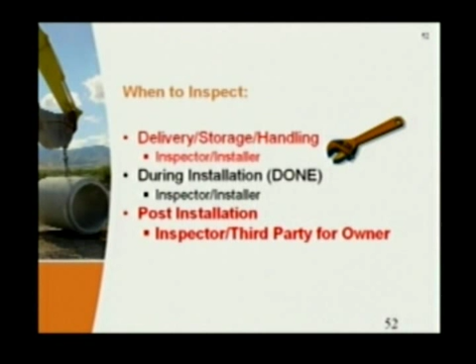Now let's talk a little about when you should inspect. Obviously during delivery, storage, and handling, you need to take care there. I can't go into great detail, but we have some good tools on our website to help inspectors and installers understand how to properly handle and offload our products. That's important. During installation, we talked this morning at great length about proper installation techniques, so obviously those need to be followed. I won't go into detail on those issues again since we covered them mostly this morning, and I suspect most of you were there. We'll touch on it a little to drive home a few points.

I do think, and I put the note up here, there's a 99% rule. I think a lot of the damage that inspectors see at the end, during their video inspections, happens from the time the truck leaves our yard... that's when it happens. So I just caution you that's a time to take care.

The contractor wants to get the product. The inspector is there to make sure everything's going well and should pay attention to what's going on. We have to make sure that when we're shipping products, we use the right tie-downs and do the right things, and when we're unloading, we do the right things too. A lot of different things can happen that damage the product, and until people start looking inside the pipe, they may not see some of that. So you need to use caution there.

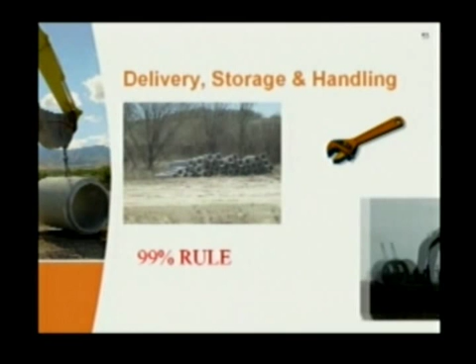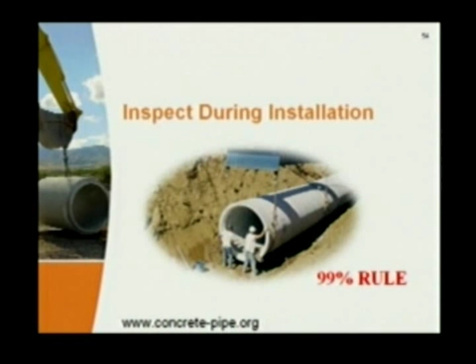We have some good guidelines on our website to help with that if you're interested. Obviously, inspection during installation means making sure the bedding's right, the backfill's right, and handling the product right without damaging it. These are the main points, the main areas of installation we talked about this morning in some detail.

But care should be taken. Good installation processes should be written either in your specs or guidelines to your inspectors, for contractors, guidelines to their field people. And they should kind of match, by the way, so that everybody's trying to do the same thing. So it's important that we watch that there.

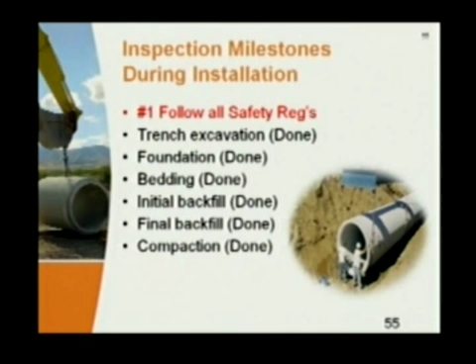Just a couple of things that we see. You may not have problems with these here, but we have seen it in other places. Lifting devices, either using improper lifting devices or handling product incorrectly. I've seen people take chains and run it all the way through the pipe and try to pick the pipe up. Obviously, that's not a good thing. You're going to break bells and spigots. I'm sure those kind of things don't happen.

But dragging the pipe along the ground, or using a forklift to move the pipe around the job site, nothing wrong with that, as long as the forklift driver doesn't do 60 miles an hour and try to jump around with it. But you can damage it. You've got to use some common sense in those handling things. Don't want to handle the product too roughly.

Homing the pipe together, putting the pipe together at the joint, making sure it goes together well, should not be a crazy hard thing to do.

I'm not, even though I put up here, using excavator bucket. That's pretty common, to set the pipe in the ground, put the spigot in the bell, use some type of mechanical device to help the line home up a little bit. I'm not too concerned about that as long as you don't ram the end of the backhoe or track hoe against the end of the pipe and tear the bell up or the spigot up. Use some kind of material, a wooden board, 4x4, something like that, to protect the pipe to help it go together. I don't have a big problem with that as long as you use common sense and don't tear the product up while you're installing it.

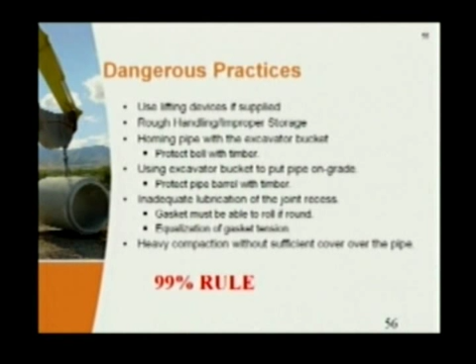So it is important to know how to do that. Let's say you put a gasket in wrong and try to put the pipe together, you could pop a bell. It's possible. You can be putting butyl mastic in and put it in the wrong place while homing the pipe, and guess what? The pipe will not go together because you put it in the wrong place. So doing those things properly will help make sure that we don't see some of those kind of problems in your post-installation inspection. And so I wanted to cover that before we got into post-installation inspection.

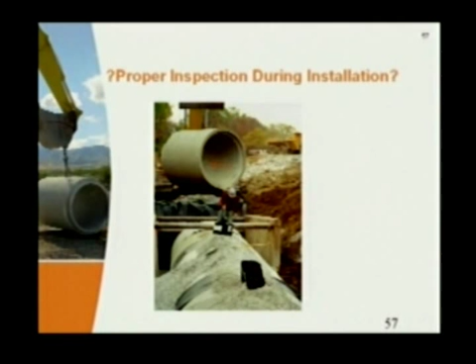Any questions, comments yet? All right. You guys are being mighty quiet. Is that an after lunch thing? I think that's what it is.

All right. Post-installation inspection.

As I stated earlier, over the last 6 or 7 years, this has become a bigger and bigger issue in the United States for sure. You'll see a map in a few moments. It's really concentrated mostly on the East Coast, so that's close to you, happening very close. I know already HRM videos their lines now as part of their post-installation process, so some of these techniques are already being used here in this area.

Just general comments - my personal opinion is, after studying it very hard, you're going to see some very good equipment in a few minutes that I think is very accurate, and you should be using it for sure on small diameter pipe that you cannot have manway access to. I certainly think any pipe that you can safely enter and look at with your own eyeballs, measure with your own hands, see what's going on with your own eyes, you're going to have a much better understanding as an engineer, and it's going to be much easier to evaluate that pipe than through camera.

I'm a strong believer in videoing lines that need to be videoed, which would be smaller lines you can't get into. There are some other good tag-along tools that go along with that video equipment that will greatly help you as an engineer or as a municipality evaluate what you're seeing. But running a camera through a line and visually trying to figure out what's going on just based on what the camera sees is very difficult and takes a lot of experience to understand what you're seeing.

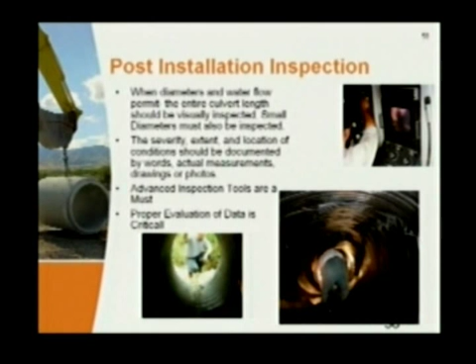But I do think there are some very good tools. Again, I think the most important thing that I hope comes across today, and we'll get there in a few minutes about evaluation, is it's one thing to see it, it's another thing to understand what you're seeing. I hope I can give you some good information there that will help you, whether you're a producer, a contractor, or a municipality that has to try to figure out what's going on, what you're seeing in the post-installation video.

So for concrete pipes, which we'll focus most of our conversation on today, because I think that's what you've come to hear about, there are several things to look at. Most of the time, the specifications I see require in their post-installation review to at least address misalignment if there is any, look at the joints, see if there are any cracks in the pipe, evaluate those cracks, and check for other structural issues that might be evident there, like spalling, slabbing, those kind of things.

But by far, the most common things that people ask me to look at and evaluate for concrete pipe are two big issues: joint gaps and cracks in the pipe wall. I want to clarify that's not to say we have a huge problem with either one, that's just what we see people asking about most in post-installation videos.

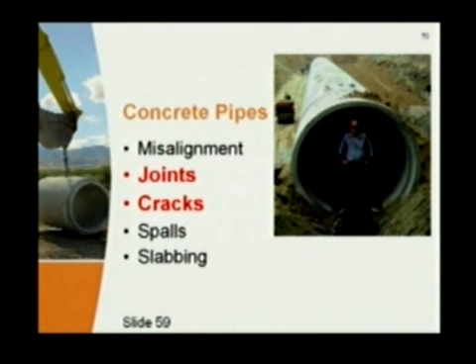So I do have some experience watching these videos. I don't have videos embedded here because I haven't figured out how to embed videos in PowerPoint yet. But it's not fun to watch anyway, so I didn't put any in. We do have some still shots from videos that are much easier to understand and look at.

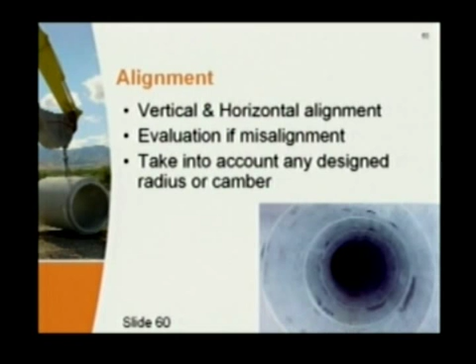We talked about cracks and joints a little bit, and I'll touch on joints again in a minute. But on alignment, we rarely have alignment problems with concrete pipe. If you see a curve in a concrete pipe, most likely somebody meant for that curve to be there - they don't just move around willy-nilly. It's a very stiff product. We don't see much vertical sagging normally, that's pretty rare, and we certainly don't see horizontal movement because the product has enough mass that it doesn't move while you're backfilling it. So thank goodness, we don't have that problem very often.

I'll touch on joints for a minute, though I can't go into great detail with only an hour. Let's say you're looking at a gasketed joint. Any manufacturer providing a gasketed joint should be able, themselves or working with their supplier, to give you an acceptable leak-resistant gap tolerance for that product.

I'll give you a chit-chat rule - this is not the official rule from Shaw, I'm not speaking for Shaw right now. They, working with Hamilton Kent, and both are here today, can give you acceptable joint tolerances for every size of pipe, and it usually depends on the pipe, their joint design, and what kind of material they're using in the joint. It's pretty simple.

Almost all the concrete pipe I'm familiar with that uses gaskets has some tolerance. A good rule of thumb is about an inch most of the time - even with that gap, with a gasket, you're still going to have a good seal. Now that's with a gasket. If you've got a butyl-mastic joint, you shouldn't be looking for a watertight joint on a horizontal alignment using butyl-mastic - you're looking for a soil-tight joint at best. You can probably go more than that and still have a reasonably good joint.

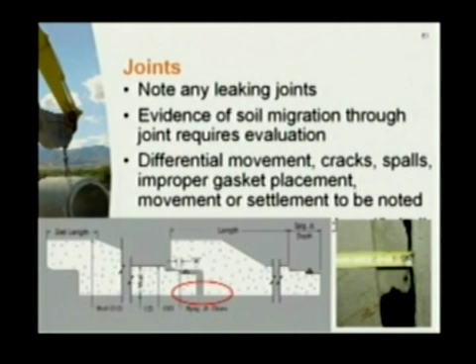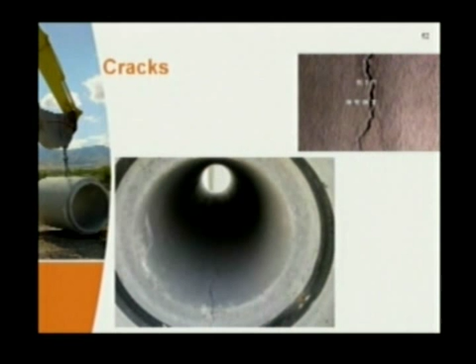I'll skip through the rest of the conversation, but that's the main points I wanted to make about joints and joint gaps. The issue we're continually talking about now is that a lot of folks looking inside the pipe find hairline cracks, 0.01-inch cracks. What's acceptable, what's not, what if the crack's here, what if it's there. We're going to talk about those things to help you better evaluate what's going on inside the pipe when you do see a crack.

I'm not going to say much about flexible pipe. The only reason I bring it up is they also have tools to remotely measure some of the conditions you'd normally find in post-installation inspection for flexible products. The big things you're looking for there are misalignment, buckling, bulging in the wall, deflection, wall buckling - those kinds of things, which are highlighted here.

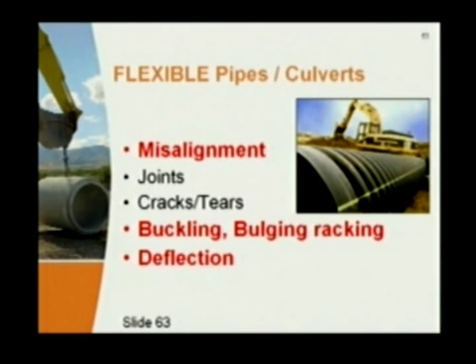Between good camera shots and another tool called a laser deflectometer, they can actually remotely measure deflection, out of roundness, deformations, and things inside flexible pipes as well. So they also have tag-along tools that can look for these types of situations you might see.

Deflection, ovality, inverse curvature that you saw in one of the pictures before. Usually flexible products have some type of deflection criteria that decides whether that pipe should remain in place with no action, should have some remediation, or should be removed.

This is kind of the typical information we see in our specifications throughout most of the United States, and I don't think it matters where you are in the world. If it's a flexible pipe, it's a flexible pipe. That's pretty good guidelines there.

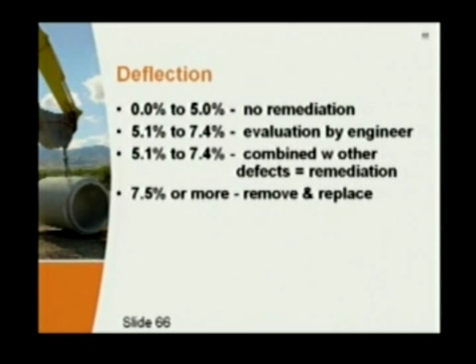Post-installation inspection - the really good tools, I think, if you have a smaller diameter pipe especially, is good closed-circuit TV cameras. Those cameras have greatly improved over the last 5 or 6 years. They've been used for many, many years in the sanitary sewer market. There's 4 or 5 excellent producers that make cameras and post-installation inspection equipment.

I didn't put their names in here, didn't think that was appropriate, but if you want to know those, come by the booth - I'll share that information with you. A lot of good folks and good equipment to do that.

The cameras, as far as I'm concerned, closed-circuit TV cameras for small diameter, those would be an appropriate design or inspection tool for any of the products you want to look at - corrugated metal, HDPE, concrete, whatever. I think those are reasonable tools to use.

Those cameras can look at pipe as small as 4 inches, and some of them can look at pipe up to 120 inches in diameter. So they have a wide range of flexibility and size, and they're very good and very accurate.

We also see a lot of mandrel testing required for flexible products because they're looking for that deflection. That's really the key thing they're looking for, to see if that pipe has over-deflected past what it should. Mandrel testing would be a reasonable test to run on flexible products if you don't want to run the laser deflectometer we're going to talk about. So that checks the shape, checks deflection. Those can be used for flexible products.

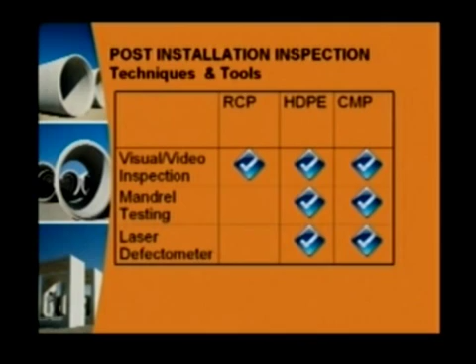So different pipe, different tools. Okay? That's really the point I want to make there. I think you got that one.

Mandrel testing - we listed it on the slide before. I think it's an appropriate testing method for flexible products, except there's a few problems, a few things you need to understand. If you pull in a mandrel or want to use a mandrel, here's the hardest thing you're going to have to do if you're a municipality: you're going to decide what is the deflection of. Am I trying to get 95% of the nominal diameter?

Am I trying to get 95% of the minimum possible diameter, considering manufacturing tolerances? Do I want to know 95% of the actual mean diameter? There's all kinds of ways to talk about inside diameter. The simplest way, for Al Hogan from Tennessee who's not very smart, is to say if it's supposed to be 24-inch ID, which is what you're hydraulically designing for, then you should be 95%, or 92.5%, or 96.5% of the nominal ID you're looking to do. But you'll hear all kinds of things talked about.

That's the hardest thing to figure out, because if you use some number that changes from job to job and manufacturer to manufacturer, that means every time a contractor wants to pull, or you want to pull as a municipality, a mandrel for a different contractor, you might have to buy a different mandrel every time, which is not very cost effective.

So that's an issue. The other thing with the mandrel, you really only know what's going on at one point. If it gets stuck, you know it got stuck at that one point. Now, you can use footage on a rope to decide where that is, kind of figure out where that is in the world. But then you take the mandrel back out, turn it around the other side and start pulling it from the other direction, and it gets stuck somewhere else. So what do you know between the two stuck places? Not anything. And there's no way to get to it if there's no manway access. You don't know what's going on. So that's kind of a shortfall.

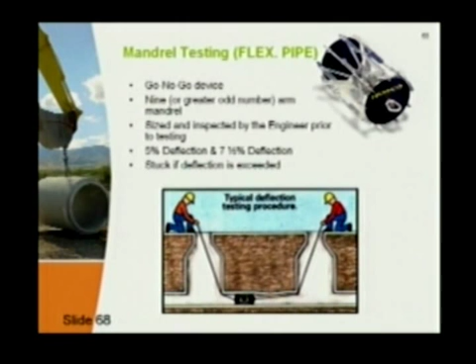What if the camera's not centered in the pipe and you're looking around a joint? What do you think the joint's going to look like? If you pan around the joint and the camera's set near the floor with a big pipe, it's going to look like the joint gap is going like this, because he's going to keep the same magnification. He's going to sweep that joint.

These cameras will look 360 degrees. They'll pull up to a joint, and you'll see them look down and see their toes -- I call it toes, it's actually the wheels, the little rubber tires. So they look down at the rubber tire: okay, I'm on the joint. They go right around the joint. And by the way, when they're inspecting, they look at every joint too, almost -- if they're any good, they do. So they're looking at every joint. They do pan and tilt and all those kinds of things. Very good lighting. They're supposed to be in the middle, but they can see anything. I mean, they will see anything.

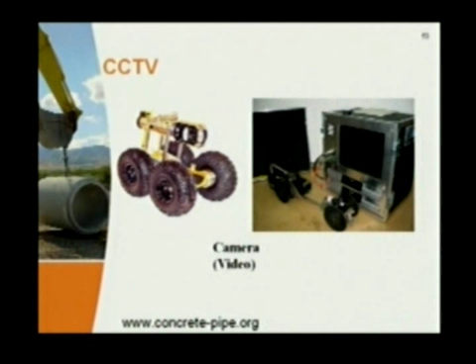Very nice tool to have if you're looking at those flexible products that are too small to get into to measure. Good tool. Different lasers, different manufacturers, their lasers look a little different, but they all do about the same thing.

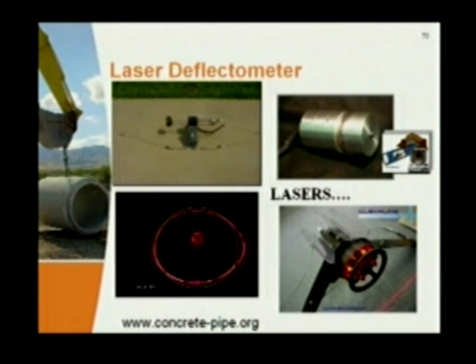There are some cameras that are one-pass, where they do their laser and video work at the same time. That's kind of handy, but it costs more. Gee whiz, I bet you couldn't figure that one out. But most of them are a two-pass system. Two-pass takes longer, one-pass doesn't take as long. So there's some swap out there in equipment, but they both do the exact same things. One of them is one-pass and others are two.

Now, for measuring other defects or conditions - joint gaps, cracks, tears, other issues that you might want to look at inside a pipe, how big the bug is on the side of the wall, or whatever you want to look at - you can look inside the pipe and measure accurately with the video micrometers.

Then they can, real time, setting right there - if you want to look over their shoulder in their truck - tell you exactly how wide a crack is, or how wide a joint gap is. So they can really see a lot of stuff. They do that by zooming in really close, so they can clearly see the edge of the crack.

They have to make sure they zoom in so they can see the edge of the crack, and not just look at a shadow. They also have to be centered right over whatever it is, whether it's a crack, a joint gap, or a tear. So there is some operator training that needs to be done when using these kinds of tools. But they can be very accurate.

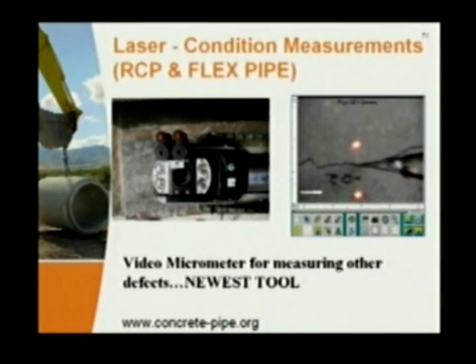But this tool can actually measure, if the operator's pretty good, cracks down to as small as that little leaf gauge that's been passed around to you.

I talked about the trends in the United States. Both tools we just reviewed, the video micrometer and the laser deflectometer, are being required or allowed right now in about 11 or 12 states, and that changes almost weekly. This map is probably a month or so old, but this is generally what's going on. The ones you see hashed, cross-hatched, those are the states that require or allow that type of technology in their post-installation inspection criteria.

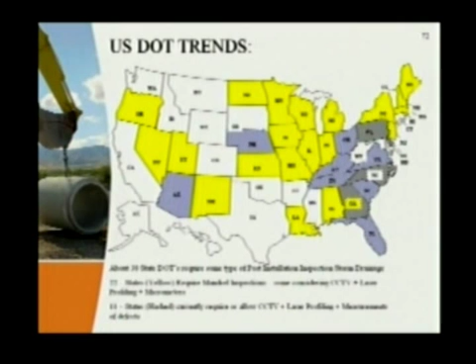Many of them require it, a few allow it. The states you see in yellow require mandrel testing for flexible products to make sure they're not over-deflected in their post-installation inspection. So that's the difference in the colors there. We're seeing quite the trend, and the big trend is it's East Coast. I think after that you're going to see it moving west, but it's really concentrated right now on the East Coast.

I think we've already talked about this. I think they're very good tools. We support the use of these tools. We think it's good for all of us to know what's going on inside of products. It's a great tool to help us, if everybody's doing everything right, see if there's things we can improve on, which is a good thing.

They do find everything. There ain't no hiding from anything, there ain't no joking around about it. It's real life, no kidding measurements, and they're really pretty accurate. So you can't really argue the technology. The technology is really good, and it's even getting better as we move along. So it's a very good product.

If you're into asset management, if you're a municipality or whatever, it's a great first step. When you do that post-installation inspection, you know day one what you accepted, what you got. And you can continue to compare what you got the day you bought it to how it looks 20 years from now, 30 years from now, 50 years from now. So we think that's going to be good information, especially for our product, as folks start doing asset management and looking at their installations over time.

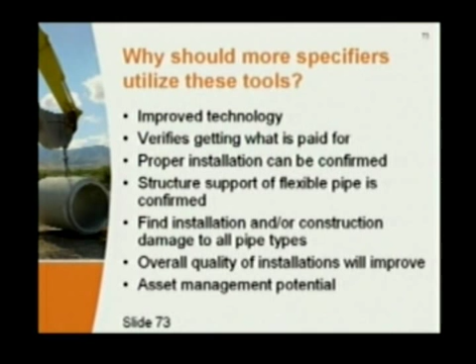Now, over the years, we have always chit-chatted about cracks in concrete pipe. We're going to talk about it. Y'all are probably sick of hearing about it for about 20 or 30 minutes here. But it is important to understand cracks in concrete pipe: how they're there, why they're there, what causes them, what's okay, what's not okay. Very important.

I do want to say this, and I challenge you to do this: there is no concrete surface in the world that I know of, hardly, that you cannot find some type of crack in. Your sidewalk, any flat work, concrete slabs, concrete pipe, bridge beams, bridge decks, anything you want to find, they're going to have some cracks in them. Now, the issue we always have when we start doing really good post-installation inspection, again we support it, but we have to go in and start talking about issues and cracks again and what that means to you, what you should be worried about, not worried about.

When we start doing good post-installation inspection, almost without fail, every time some new standard comes out of the DOT, the first 2 or 3 jobs are just a fire drill. Everybody's pointing, everybody's screaming, everybody's yelling, the contractor's mad at the supplier, trying to be nice to the DOT and nice to his customer and all those things. It really gets difficult to deal with.

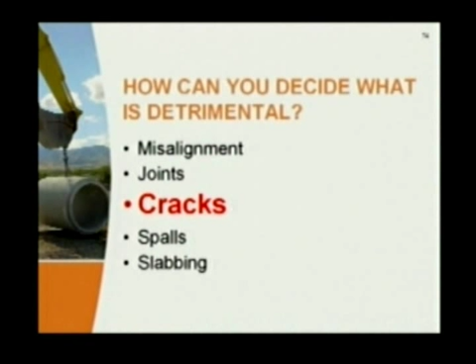We're involved, engineers and other engineers are involved. You get about 10 people with 10 different ideas. So I hope this today will maybe get us generally on the same page here. I think that'll help when you do see things in your post-installation videos.

Now, just a little bit of concrete anatomy. Concrete is very strong in compression, weak in tension, right? We know that. We understand there's some areas of our product that will be in tension once it's loaded, and we'll look at that in a minute.

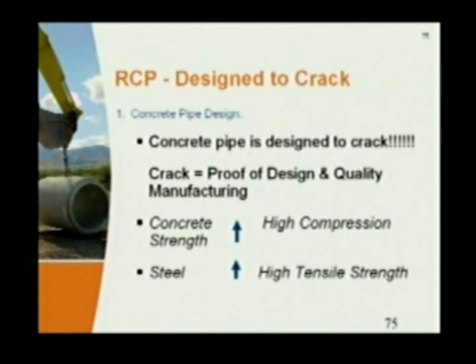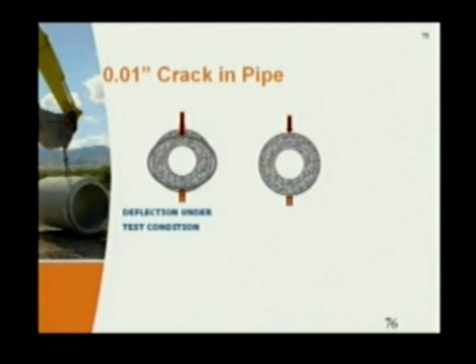Those tension areas, guess what we put in them? We put in steel. That's the reason our pipe is reinforced concrete pipe. If we didn't have any tension in the product, we wouldn't need any steel. The steel is there to control the cracks from getting too wide, okay? That's the very basics of the crack, and I think you guys probably understand that pretty well. When the pipe's loaded, it is trying to deflect, even though concrete pipe will not deflect very much. There are zones of the pipe that go into tension.

Those tension zones, once it's loaded, are the areas in red. So where would you expect your cracks to be if you ever see a crack in a concrete pipe? What's the first place you expect to see a crack? Bottom of the pipe. Thank you very much, that's normally going to be the first place. Anybody got a guess on the second place you're going to see a crack? Top. Perfect, you guys are way ahead of me.

Now what if you see a crack on the inside of the pipe at the spring line? It's on the inside, it's probably all the way through. I don't think you're in trouble, but it is probably all the way through. But remember, that crack's probably not ever going to get very big because it's in compression right there. It's trying to hold itself together, the product is. So that's kind of how it's going to happen.

Let me say this, I think maybe I got on the next. No, did I do? I'm trying to think if I got a three-edge bearing rack on here. I don't guess I do. I must not.

Tied together pretty well what we're talking about this morning. We do strength test our pipe before we ship it. We do that through the use of a three-edge bearing rack, and there may be a picture coming up. I can't remember if I've got one on my slideshow here or not. But we load it just like the red arrows show it. Two little hard rubber strips at the bottom and a hard rubber strip at the top, and we compress that pipe and check the strength.

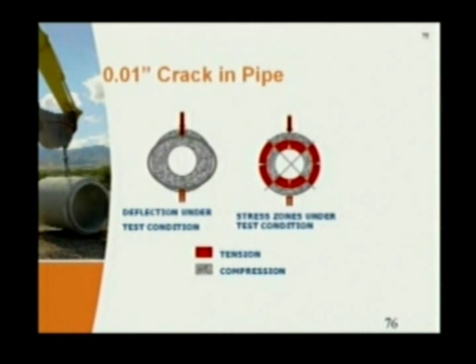One of the other things that we do, if you get to do a plant tour, is maybe, as we talked about a while ago, do a demo for your post-installation inspection. Because then you can set up the pipe on the ground, we can pre-crack it, we can hold a crack open at different dimensions. You can run the cameras through it that we talked about, and you can see how the camera sees a crack.

And you can take your eyeballs in that pipe and see how your eyeballs see the crack. And where's the little leaf gauge at? Somebody got it, little leaf gauge - oh, somebody got our leaf gauge. Where's a 100th-inch leaf? Come on now, you can't steal a leaf gauge, that thing's worth $10. There it is. So you can take that leaf gauge and see - the camera sees that type of crack, and it can zoom in on that crack and make it look extremely large.

But in reality, the crack's not changing, the zoom of the camera's changing. That's an important thing to understand. You can tell when you're watching videos, you can see them zoom in, zoom out. And if you really have the full reports, you can tell what zoom amount they're at. So that's important to know.

Now, we talked about how the cracks form. How am I doing for time, Ron? I'm okay, I'm good, right? Yeah, I'm real good. All right.

So let's talk about now. We talked about how the cracks form a little bit, talked about our test crack criteria being 100th inch. Understand, that's a test criteria at the plant. It has nothing to do with the performance of the pipe in the field. Nothing. Not anything. Zero. But we do need to understand the width of the crack and maybe have some criteria there. Understand what some of the national standards say about that, because I think you could use those as a guide, and we'll talk about those.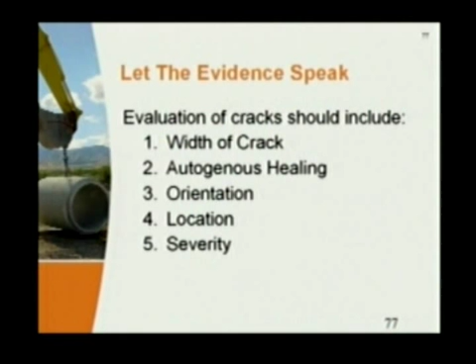Now, I don't know if I've used this word or not yet, hairline crack. When you come see a pipe test at our plant, when they're testing it, you'll see a very small crack form before we get to the 0.01-inch crack. That crack width that's less than 1/100 of an inch is a hairline crack. Now, not only can those hairline cracks form by load, as we're loading on a 3-edge bearing, they can also form just by what we call shrinkage cracks.

Most of you know a little bit about concrete. We do cure our concrete very well. We have a prescribed rate of temperature and moisture control that we have to meet to get good quality pipe, and we do that. But no matter how good you try to do that, and as best you can do, occasionally you will have some shrinkage cracks right in the surface of the concrete. That's not structural. That's not an issue. It's very shallow, really just on the surface. So those, you can see some of those very small hairline cracks because of shrinkage.

You may see those on your job site when the pipe gets there. That does not mean there's anything wrong with the pipe. That's not a structural issue. It's, in my opinion, not even an aesthetic issue, but some people think it's an issue. So be aware of that. So hairline cracks are not a problem. Hairline crack on the job site, delivered, or in the ground, would be less than 1/100 of an inch. That is a definition of hairline crack. And we've even talked a little bit about how they can form.

Now, the next one that we see talked about a lot is a 0.01-inch crack. It's talked about a lot because our manufacturing standard and our testing standard for our 3-edge bearing, that's the crack we're looking for. That has nothing to do with cracks in the field. But we end up having to talk about that because that number gets thrown around a lot. 1/100 inch crack, and who's got the gauge now?

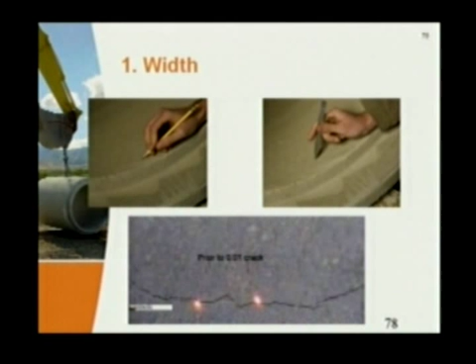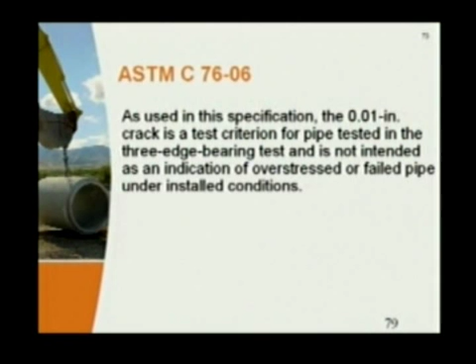Very, very minor crack as far as I'm concerned in the field in the installed condition. Again, ASTM sets that as a test criteria at our plant. So then we have people trying to apply, municipalities, whoever, consultants that write specs, they want to apply that standard to pipe in the ground. That's not a good application. It is a testing criteria at the plant.

We've had to address this for 80 years now, so we're used to talking about it. That 1/100 inch, even the test criteria is arbitrary. It really does not mean anything structural, other than when they first started writing standards back about 1900, the spec said when we test our pipe for strength, you were watching for that crack, the first crack to form. Well, without my glasses, the first crack's not going to form for a long time because I can't see it. With my glasses, the first crack forms a lot faster. I can say, oh, there it is, I got it.

You stop the test. Well, my test today, and John can come back behind me tomorrow, run the same test on the same exact piece of pipe made the same day, and he would see the crack at a different time. That's not very consistent. That's not giving us good information. We have to have something more

objective than that. So it said, oh, the guy happened to have a feeler gauge, 100th inch. Oh, there it is. That's good. That's a kind of a small crack. That's what we're looking for. We're going to start looking for that. What I would say is really the steel is picking up zero load until at least a 100th inch crack, maybe even a little past that, but at least a 100th inch crack.

The steel is not catching any load until that happens. So in my opinion, a 100th inch crack has nothing to do with structural condition in the field, and should not concern you.

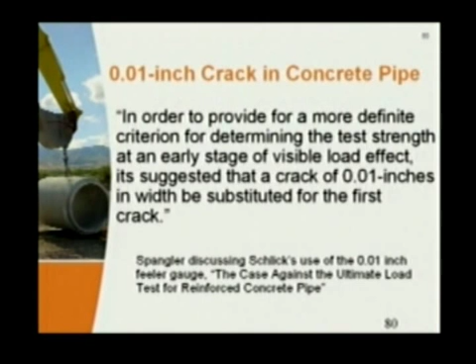Again, we put the reinforcement in our pipe to control the crack width. That's the reason it's there. It also helps us for some strength, but mainly it's helping us with crack width. Most of our product without the steel on the 3-edge bearing rack would make the 0.01-inch crack without the steel. But what would happen as soon as we got past the 0.01-inch crack with no steel in it? Very quickly what would happen? We would have a catastrophic failure. It would bust all to pieces.

With our steel, you come to their plant, and I guarantee this will happen. You take a 36-inch pipe or bigger - I'm using that because I know this will work - you can load that pipe to 0.01, and it probably won't have a crack in it. The prescribed rate won't even have a crack in it. It'll usually go 10 to 20% past that before we even see a 0.01-inch crack.

Then we test it up to ultimate. It'll usually exceed ultimate by 10 or 15%. And you can still continue to load that pipe. Now, the gauge won't measure any load, but you can still continue loading. The cracks just keep opening. It's not really taking any more load. It's just deflecting. But that pipe will never bust all to pieces and just fall apart.

They can keep on hammering on it. It just won't fall to pieces. So it's a cool thing to see. Don't know what it has to do with what we're talking about today, but anyway, it is very strong. That's the reason we have steel in it.

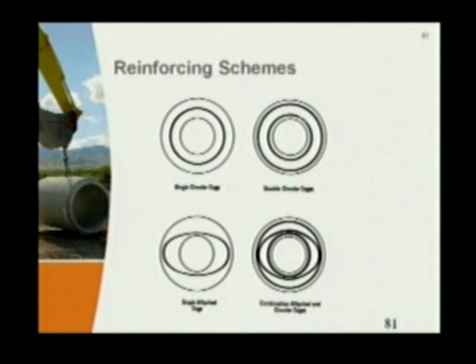It controls the crack. The steel in small diameter pipe, which we have not very much cracking issues with anyway, that steel is right in the center of the wall usually. And we usually use a single cage up to about 24, 30, 36, something like that. And once we get to 30, 36, it's usually 2 cages. You see what a 2-cage scenario looks like in the top right-hand corner. Those 2 top pictures are the more common methods of steel reinforcement placing. The other 2 would be some really unusual setup.

We've been talking about this for a long time, even back as early as the mid-1900s, and we started getting our bedding information much better and doing a lot more research. One of the pioneers in our industry, who did a lot of research for our pipe, made the comment that cracks up to 1/16 of an inch will not permit corrosion except under the most adverse conditions.

That's usually what we hear from engineers or people looking at the pipe trying to evaluate it. It's got a crack in it, I'm getting some seepage through the crack, so I'm worried that the steel inside the pipe is going to rust and cause spalling. That would be a very rare condition for a crack.

As he says, up to 1/16 of an inch, I think that's pretty safe. I don't think you're going to have any problem with that. Remember, one side of the crack is trying to open on a round product, and the other side is trying to stay shut, no matter where it is. One side's in tension, one side's in compression. One side is squeezing down, ain't going to let nothing in. The other side is trying to open. But they're doing it at the same time.

Even if somebody made the comment, if it's through the wall, you've got a problem - I don't think you've got a major problem just because it's through the wall. I think there's got to be something else that would cause you to have a big concern. Even if you had a crack at the top, bottom, and spring line of the pipe, if none of those cracks are 100th of an inch, you definitely don't have a problem.

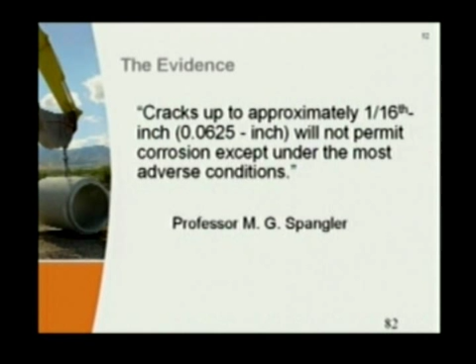Now, when they start getting open more, we'll talk about that - maybe they need to consider some other things. But a 1/16 of an inch, according to Mr. Spangler, would be okay. You shouldn't be worried about corrosion in your steel, and I think that is a reasonable thing to think about.

20 minutes. I'm on 83 - oh, that's pretty good. I'm okay, I think I got a 98, so I'm getting close.

AASHTO LRFD - I didn't say this yesterday, but that stands for the American Association of State Highway Transportation Officials. Doesn't mean nothing to you probably, but in our world, I said that yesterday too and got myself in trouble. In the United States, that is the group, the DOT engineers, who get together and write specifications for all products, including concrete pipe.

So this is not a specification written by Al Hogan, not written by ACPA, not by Shaw. It's by a group of DOT engineers that write the specification. They send it out to all the other bridge engineers in the United States and say, does this look okay? So this is what they came up with.

I think it's a pretty good guideline. If you were going to write a specification for your municipality, this is a good starting point - you might want to add some detail to it. Because remember, they're writing a specification for the entire United States. You may have something you feel is a little different, that needs to be handled differently, so you might want to add a little more detail to yours. But this is what they say.

We're still talking about crack width now. A crack less than or equal to 1/100 of an inch should be considered minor and okay - we've already gone over that plenty enough. But that's even what AASHTO says. AASHTO also says a crack between 0.01 inch and 1/10 of an inch...

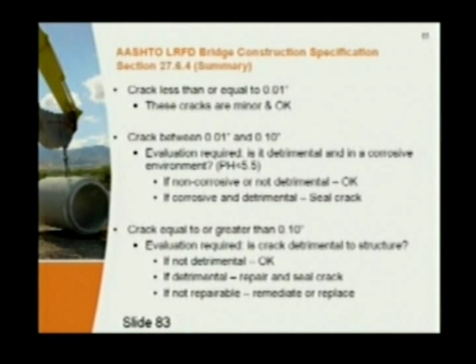For a crack equal to or greater than a tenth, they're thinking we really need to check if it's a structural issue. They don't go into great detail in their explanation, but if it's a structural issue, it needs to be repaired or fixed. If it's not a structural issue, it can just be sealed to keep water and material from moving in and out, which could cut down on the lifespan of the product. If it's not repairable, it can be remediated or replaced. That's the AASHTO guidelines, not mine.

Now, on small cracks, we have several pieces of research on autogenous healing. You can see this if you go out to the plant - if a pipe's been in your yard for a while with a small crack, you'll see this phenomenon happening. Free lime in our product reacts with moisture, and crystals start forming inside the crack, filling it up. That autogenous healing is a very strong process. In fact, you can take that pipe and put it in a 3-edge bearing rack, and it may crack somewhere else first, not even at that original crack. So it really is a real thing, it really does happen. I think there's a limit to how big a crack it will happen in - if it's a big crack, it may not ever happen because it doesn't have the two sides of concrete to bond to and form crystals.

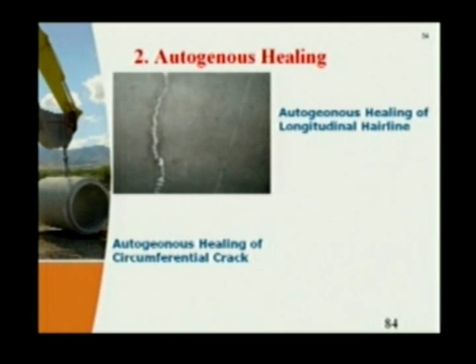I've seen research that shows it happening greater than a tenth of an inch, but a tenth of an inch is probably a good threshold to think about for that kind of thing to happen. I think it's a real issue you ought to consider. We do have some research - I'll flip through that, but I can hand it to you later if you want it.

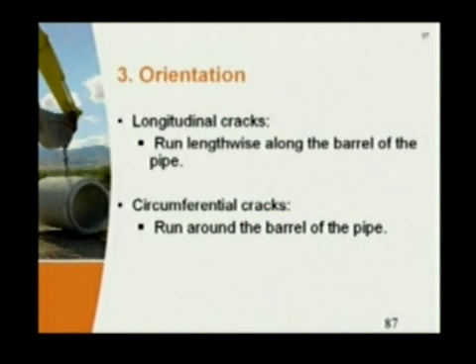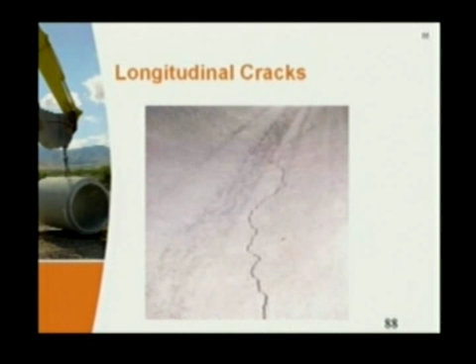Orientation of cracks: long cracks down the barrel of the pipe are normally loading cracks - doesn't mean they're overloaded, just means it's caused by loading. Circumferential cracks run around the barrel of the pipe, and we'll talk about those a bit. This is a fairly significant longitudinal crack - I don't remember what the measurement was. AASHTO talks a lot about longitudinal cracks because they understand those are loading cracks that need to be evaluated more stringently. If they're wider than a hundredth, as we already said, they ask for evaluation; they're acceptable up to a tenth of an inch, as we already talked about.

Longitudinal cracks here, again, same thing I said. I'm getting ahead of myself by a slide or two.

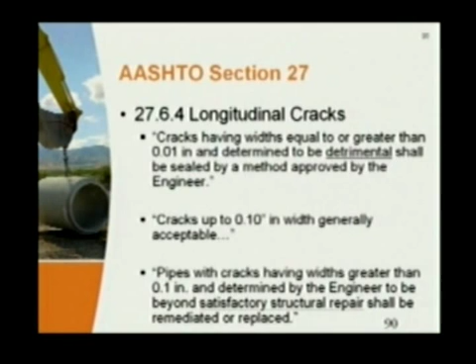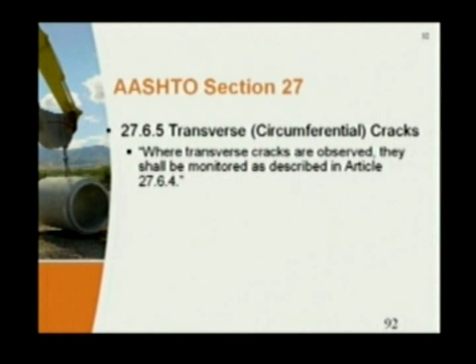Circumferential cracks, or transverse cracks as they're called in the AASHTO documents, shall be monitored, and that's all they say. And I'll tell you the reason I think they say that: those cracks are not a structural issue for us, for our product at all.

So if you get a circumferential crack, which steel is that crack cutting across? It's cutting across the longitudinals. They're only there for holding space. We don't care if every one of those rust in two. We don't care if they break. It doesn't make any difference from the structural standpoint of the wall of that pipe.

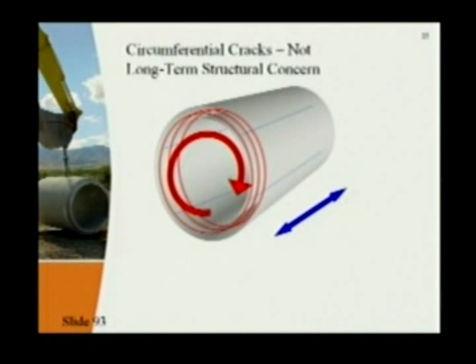Now, circumferential crack, if you have some offset in it, or it can get very wide, then you consider it as a joint. It needs to be sealed in some way to keep material from moving into the pipe. That's about the best way I can put it. From a structural standpoint, they're not a big issue.

Now we've talked about this already, so I'll skip over it pretty fast. Invert and obvert cracks, small cracks, those are normal. You should expect to see those occasionally. They're not an issue. Spring line, again, those cracks are probably through the wall, but remember, the inside is trying to squeeze together, so they're probably never going to get very big, especially if you don't see any spalling. They're not a serious consideration, but the pipe's under a pretty considerable load, maybe even more load than it was designed for.

So the first thing I go look at is design if I had those. But I still think you could apply some of the width criteria we're going to talk about to whether they should be repaired or not.

In the haunch, and when I say in the haunch, I mean between the invert of the pipe and the spring line, if you get cracks over in these quarter points, really watch those because they could be a minor crack, but there are occasions when those are a first indication of a process we call radial tension shear.

What's happening there is that the pipe is trying to deflect. It's got a serious load on it. In fact, the pipe's under such load that the steel that's supposed to be a round cage is trying to straighten out and flatten. So when it tries to flatten out, it starts cracking along one of those long bars. It'll follow that long bar, and then that steel starts trying to straighten up, and it'll pop off a large section of concrete, which we call slabbing.

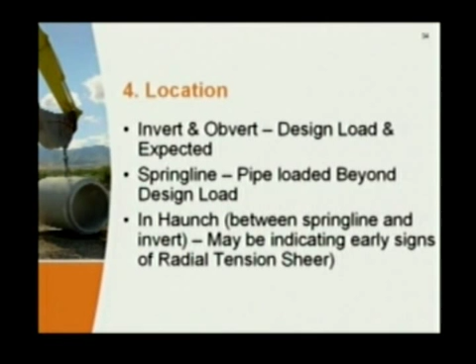Severity, again, we talked about width — I think that's your first criteria to start with. We talked about location, that's another good telling sign. Is there displacement across the crack? If not, you're probably okay as long as it's not too wide. Is there signs of radial tension shear that we just talked about? That would be an issue.

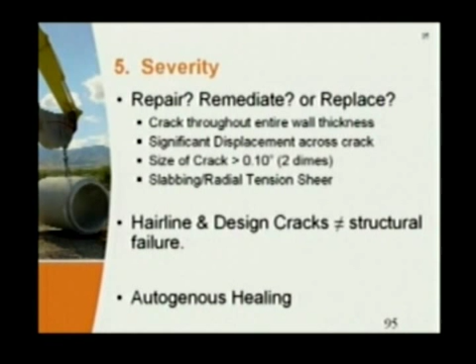Cracks up to 1/10 inch, I would start looking at whether I'm in a corrosive environment. If I'm not, I'm not too worried about it. If you have some leakage you want to deal with, seal them. But I wouldn't worry about it too much till I got up close to 1/10 inch, or somewhere above a dime width at least, okay? Consider autogenous healing in those small cracks.

I think you'll see that forming in a very short period of time. That's a good place to start from. Understand that video technology makes cracks look bigger than they really are. If all you're using is video, you need to be really sharp in understanding what you're seeing.

If you really want to be good, if you want to look at the pipe and do a really stringent inspection, get those tools that measure crack widths in a smaller diameter. In the large diameter, go in and measure them and use the criteria that we talked about today, hopefully, or something very close to that.

It'd be nice for all the players, all the stakeholders, from the owner to the producer to the installer, to have nice, clear, written direction of what's going to happen, if we see this, this is the action we're going to take. Then everybody knows what they're into.

But I also think if you do that, it needs to be reasonable. It's not to the city's advantage, the user's advantage, or anybody else's advantage to repair things that don't need to be repaired. You're spending money that does not need to be spent. Now, it's also just as bad, though, not to fix something that really needs to be fixed. So you want to be reasonable with your repair criteria.

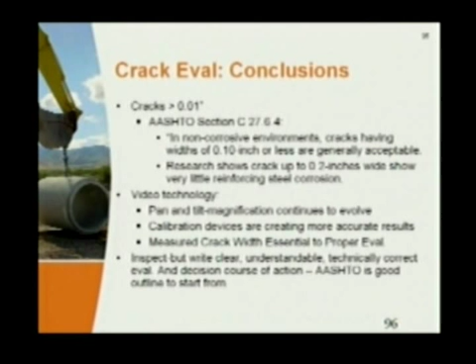I'm good, right? I got time? Okay.

How many were here this morning in our presentation? Oh, excellent, so 99% of you were here. Good, so y'all got this.

We've seen this before. This is the design we did this morning. Anybody remember what class of pipe this example called for with a type 2 bedding? Anybody remember what the class of pipe was? It was a class 3.

All right, we also ran the design using a type 3 bedding, correct? What was the class of pipe required there? It was a 3, but it was right on the edge of a 4, right on the line between 3 and 4. Depends on who you are. I would call it a 4, but by math it was 3. But we all agreed that it'd probably be better to have a class 4 there.

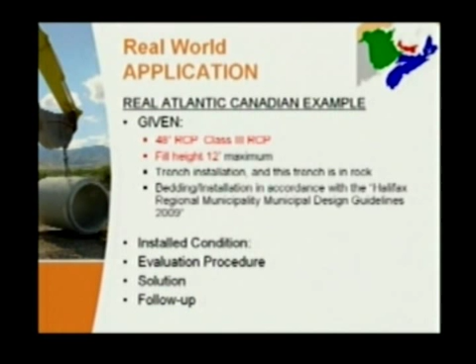So this condition here would call for class 3 or 4 pipe. Okay? We know that this particular job was installed with class 3 pipe. All right, now let's look at a few pictures.

These are not still shots from a video camera. I'm sure these are just still digital images. But this is kind of what you'd see if you were looking at it through the camera. I wish we had one that was really looking at it through a video camera because it really is significantly different looking. Here's a real shot, the real digital camera shot.

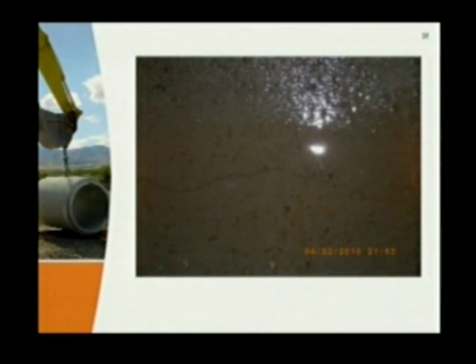There's a picture of a section. This is in the invert. I know it's an invert because there's water there. Okay, another shot of the invert. Little crack there down the invert.

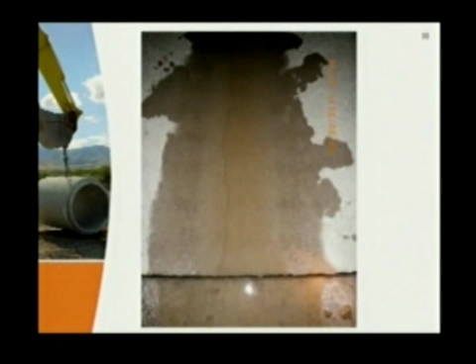Here's a picture of the bedding and backfill. Not totally, but you can see the Class A or Type 1 crushed stone material fully embedded around the pipe, it appears. You see rubble stone, shot rock, that's what I call it. Backfill above that, I assume that was all the way up to grade. Remember, this is 12 feet deep. Well, would you expect to see those kind of cracks?

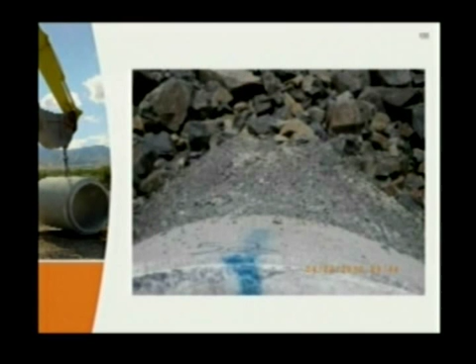I wouldn't have if I hadn't done a little studying, and I didn't do the math. When we did the math this morning, maybe it could be needing a class 4 here. We talked a lot about it this morning in our installation issues. There may be another way to do it besides going class 4. But let's stick to the evaluation for a minute, we'll get back to that.

All right, so now we went through how to evaluate cracks. Now, I would tell you this, I'll give you this hint. That pipe was 48 inch, so we could walk inside of it, right? We walked inside of it.

Who's got the 100th inch gauge? You got the 100th inch gauge, right? Hold it up again, you got it? There it is right there. That would not go in that crack you saw, which means it was less than a 100th inch crack.

All right, so what should we do with that crack? I heard the right answer, somebody said it louder though. Not a thing, there's not a thing to do with it, it's not a problem, all right? And I doubt it probably wasn't quite that easy. Now, I don't know that we repaired anything, but I bet it wasn't quite that easy in real life.

So it's less than a 100th. Even if it had been more than a 100th, up to a 10th, I would say if the PH is okay, if there's no other issue that concerns me, no offset in that crack, I would have still said it was okay. Worst case, up to a dime or bigger, you might want to seal the crack, but I'm not even sure that's necessary. I personally don't think it is.

The crack location, would that be expected? Yes. That's the first place you're going to see a crack, top and bottom, so it's not like I'm freaking out that, oh my God, it's in the haunch and it's got a big offset or anything. So it's an expected location.